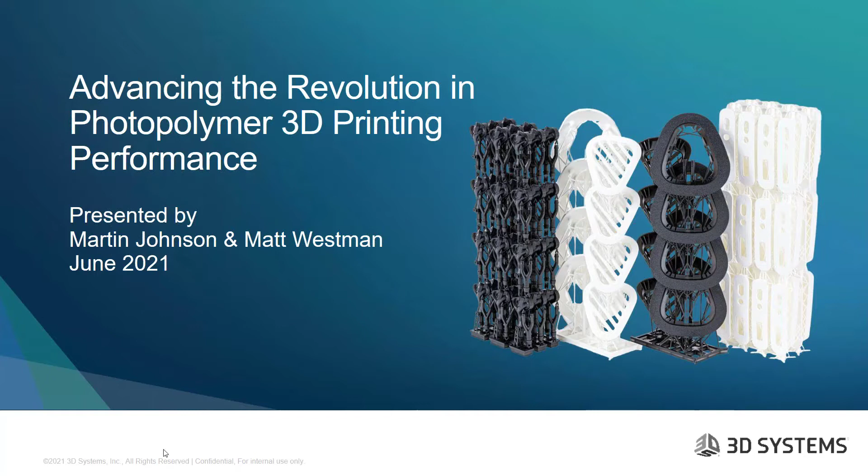At this time, I'd like to introduce you to today's speakers, Marty Johnson and Matt Westman. Marty Johnson is a technical fellow at 3D Systems and is part of the core team that develops 3D Systems Figure 4 platform. With a background in mechanical engineering, Marty has extensive experience working with injection molding tools in different plastics and brings this perspective to his work with additive manufacturing to deliver solutions that balance speed, accuracy, cost, and performance.

Matt Westman is a senior materials characterization scientist at 3D Systems with over a decade of experience in polymer development and is an expert in mechanical, thermal, and thermomechanical characterizations. Matt is a leader in developing weathering and long-term stability characterizations at 3D Systems. As an active member of multiple standard organizations, including ASTM and CMH17, Matt is committed to bringing the next generation of production-ready polymers to additive manufacturing. At this time, I'd like to hand it over to Marty to get us started.

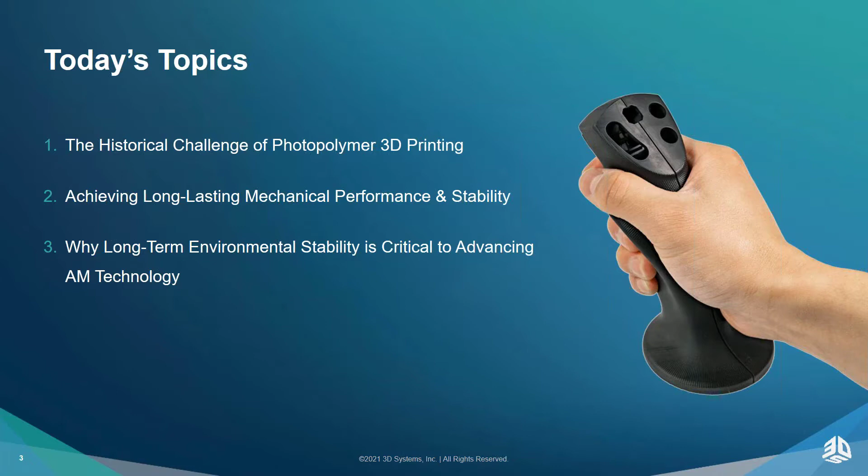Thank you, Tess. Really glad to be here and really glad to be talking about photopolymers and additive manufacturing. A lot's happened and a lot's changed in the history of photopolymers and 3D printing. We're looking forward to presenting some of that, what some of those challenges have been, and how we've really moved that forward. A big part of that's going to be through looking at how we've achieved long-lasting mechanical performance and stability, and why long-term environmental stability is critical to advancing additive manufacturing technology. So Matt's going to take you through the historical challenge of photopolymer 3D printing.

Before we get there, I just want to take a quick look at some of these advantages and challenges. One of the things that have been really good about additive manufacturing is the aesthetic part quality. Photopolymer 3D printing is known to deliver the smoothest surface quality. You can get really nice fine detail, realistic plastic parts that are really close to injection molded quality parts. So you get the smooth sidewalls and you get the feel of the plastic. That's one of the really nice things that's happened with the materials and the technology in additive manufacturing.

And then you follow that up with the overall versatility. There is a lot of versatility in additive manufacturing for looking at materials, looking at designs early in the product development phases, different ways of prototyping parts, the ease of printing, what kind of geometries you can do in additive manufacturing that cannot be injection molded, and how you put some of these parts together in ways that you can innovate and get different products and solutions for different applications.

But when you get to material performance and longevity, that's been the problem for photopolymers in additive manufacturing for quite some time. Over 25 years of use, these materials have advanced and gotten much better, but getting to that long-term UV and humidity stability has been the real challenge. Part of that is, what are the mechanical performances that you get over time? Do your parts become brittle? Do they change color? How can I use my part 2 years from now the way that I can use it today? These are some of the things we'd like to address today as we look at the different photopolymers.

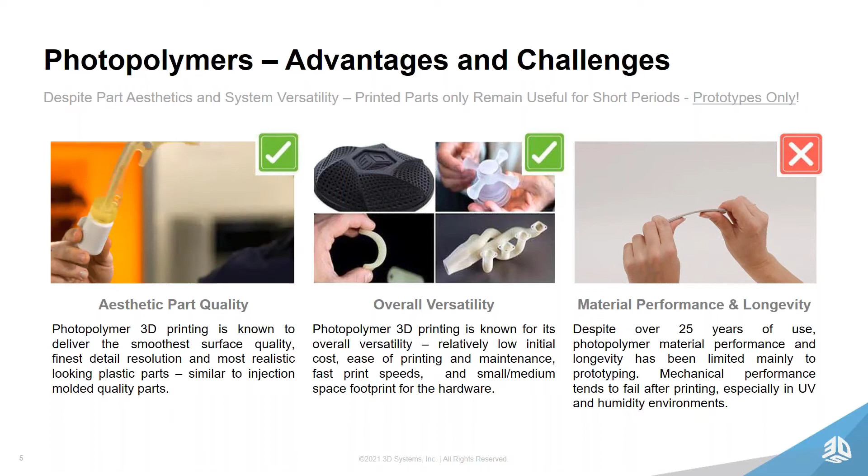So Matt, why don't you take us through how we got to long-lasting mechanical performance and stability? Thank you, Marty.

As 3D Systems approached the challenge of addressing long-term stability, the first step in this process was developing a case study and a material that was well characterized. Many years ago, we selected one of our early Figure 4 materials and began characterizing it and developing large data sets using a weathering chamber known as a QUV. This uses a fluorescent UV light source to replicate and validate ASTM outdoor and indoor testing. Specifically, we were targeting ASTM G154, the outdoor weathering standard for polymers. In this case, we were just looking to explore and understand what our material base was.

After we thoroughly characterized one of our materials and developed a case study, we were then able to generate these really lovely curves that projected hours of exposure and plotted as a function of decay of mechanical properties, which is really great. But without having any baseline or relevance to show, it's very hard for customers to understand what 200 hours in a QUV replicates.

And so the next step in this process, and this path that 3D Systems took, was actually doing actual weathering of samples. We selected 3 of our North American sites that had very unique weather environments or environmental factors. We included sites such as our Rock Hill manufacturing, our headquarters, which is going to have more of a hot and humid type of environment.

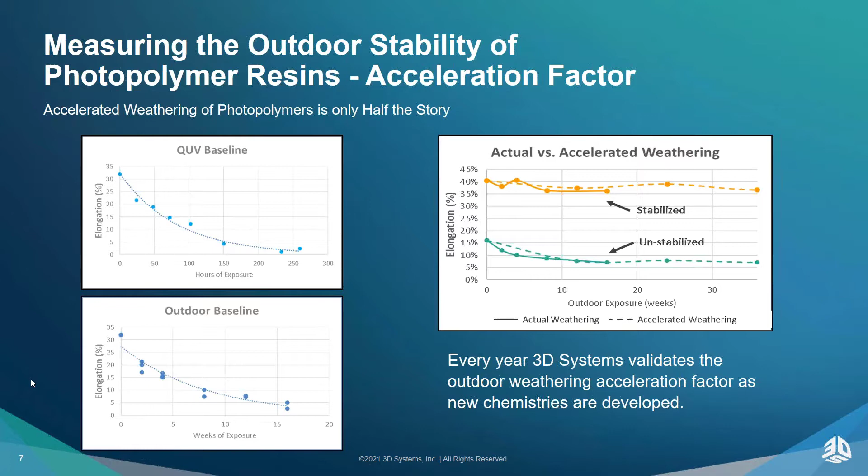So like I said, after we've developed these acceleration factors, we then went and developed some very novel chemistries and chemistry packages that were providing us best in class and really unparalleled weathering stability that you don't see in the additive space. As Marty alluded to earlier, typically additive parts and UV photopolymers specifically are very well known for becoming brittle over time. This is only exacerbated when you put them outside with a combination of both the sunlight and the moisture. This combination really drives the degradation of the polymers.

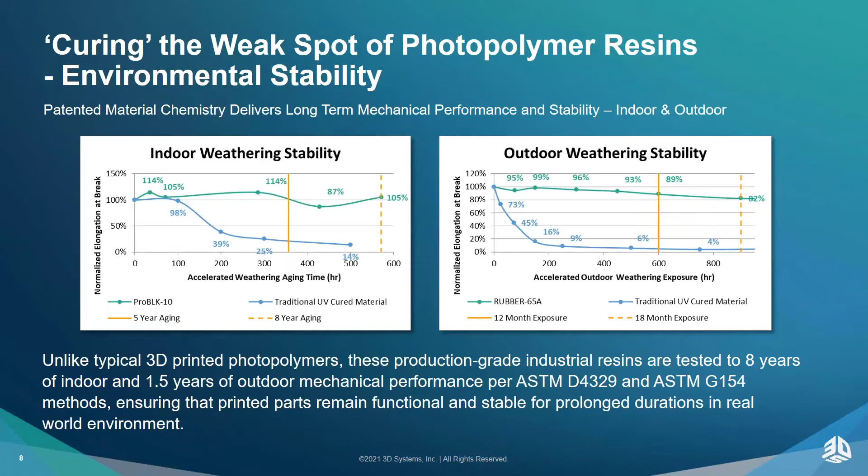Traditionally, photopolymers, and specifically elastomeric photopolymers, have very, very poor performance outdoor. We typically see them degrading much faster than the blue traditionally UV cured material we're showing here. But with our novel chemistries and technologies, we're really extending the lifetime of these materials well out past 1 year stability and out into 18 months or multiple years.

Aside from mechanical stability and tracking change in properties over time, another aspect of long-term stability that 3D Systems is looking at is color stability. Once again, with our traditional photopolymers, we know that the materials, as they degrade, also have a tendency to turn brown, turn black, discolor, and turn yellow. This is a well-known issue with photopolymers.

We really believe this gives customers the opportunity to design and develop materials for long-term applications, and they'll have that confidence that the material will not only perform well, but it will also look really, really good. Another example is our new Figure 4 Rigid White material.

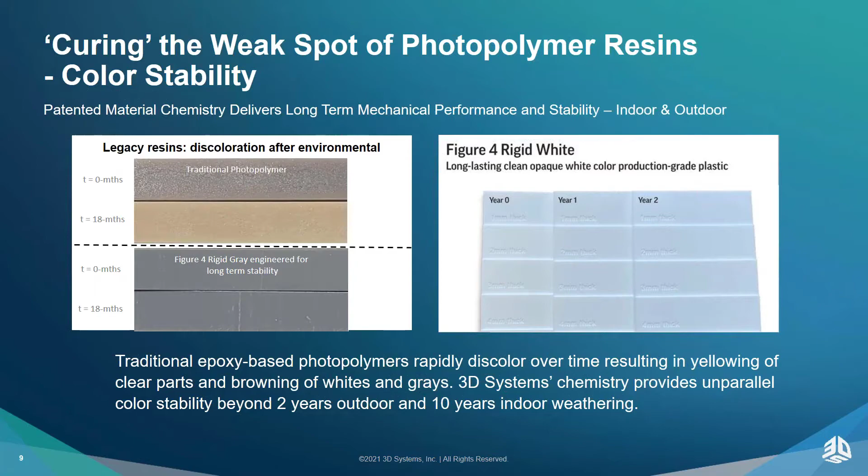Thank you, Matt. And so when you look at this kind of data and you see where these materials are lasting longer, not just for elongation, but for tensile modulus, tensile strength, notched impact, all of your mechanical properties are pushing out. And now we're looking at these in years and not months. What do we do with that? And why are the UV and humidity stable data and materials so important?

Let's look at that, because the reason why is that you now have long-lasting parts with additive manufacturing. And what that leads to is more vast applications that you can address with the different materials. So a few of the places we want to look at today are production goods, where the benefits of long-lasting parts come in, and contract manufacturing, where people are engineering for product manufacturers, OEM products, things like that. Contract manufacturers now have more tools to advance some of the things that they're doing.

Manufacturing aids, guides, rails, diverters, jigs and fixtures, the kind of things that need long-lasting applications so that they can be used to advance the manufacturing lines and even make those safer. And then you get into clinical trials, and this is where the color stability will come into play, because the color stability, especially for white materials, is really critical for things that you need to push out over time.

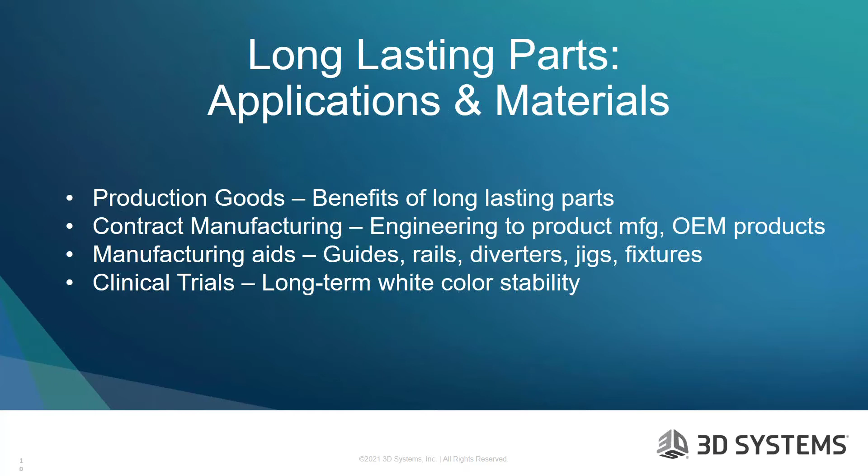So we'll start with the production consumer goods. If you look at the table to the left, you're looking at some different consumer segments: electronics, consumer appliances, sports and fitness, even outdoor goods. What are the kind of warranties that you see on these? Listed in this table are some of the average warranties you'll see for these types of products.

If I'm doing a gaming console for consumer electronics that has a 2-year warranty, and I have additive manufacturing parts for that, then I need to be sure that I can cover the shelf life for those parts, which a lot of times is a year or 2 years. And I also want to be able to cover the warranty for that part. So the long-term stability enables me to make parts through additive manufacturing for end-use production.

So you start looking at extended warranties. A supplier is not going to just extend a warranty. They can look at the data. They can look at the risk analysis. They can look at the life of the part. And if they know that part's going to be the same color and have the same mechanical properties from when it comes out of the package through the life of that product, now they can with confidence put out these extended warranties.

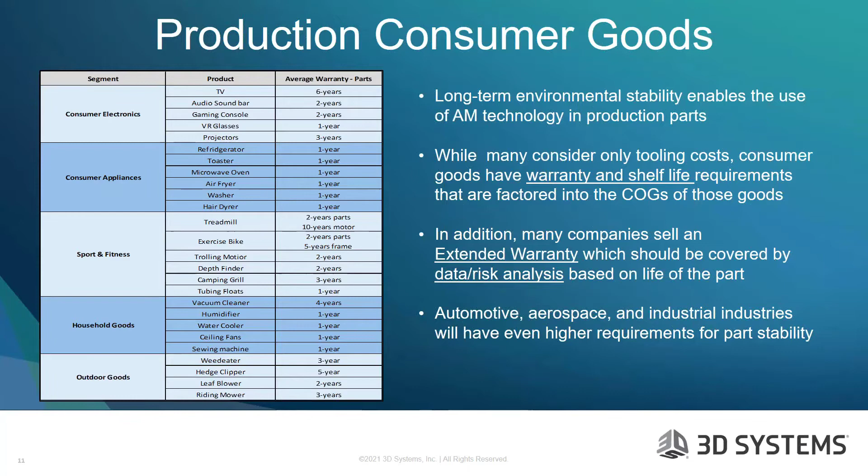So let's take a look at contract manufacturing. To the left, there's an aftermarket camera that goes onto the back of a vehicle, and the aftermarket camera is bare. A contract manufacturer took a look and said, we've got a solution to that, because when these cameras get rain on them, you can't see, you can't back up, which is aggravating in the morning backing out of the driveway. So to keep the rain and dew off the lens of that camera, they developed a cover.

This is something they could go in, they could use that cover because they know the cover is going to last. It's going to have the same properties out to 5-8 years. And it gives them the ability to start creating and innovating on some of these OEM type products and aftermarket type products. So these contract manufacturers now have, as I mentioned, a really good tool that they can go in to start producing these type of products.

This is a real good example. This is a Flex Black 20 here. You can see the chart. This is a material that's really tough that you need for an application like this. And you can see the elongation at break outdoors has only gone down to about 11% loss in elongation at break out to 8 years. So this part's going to maintain and work for a good long time.

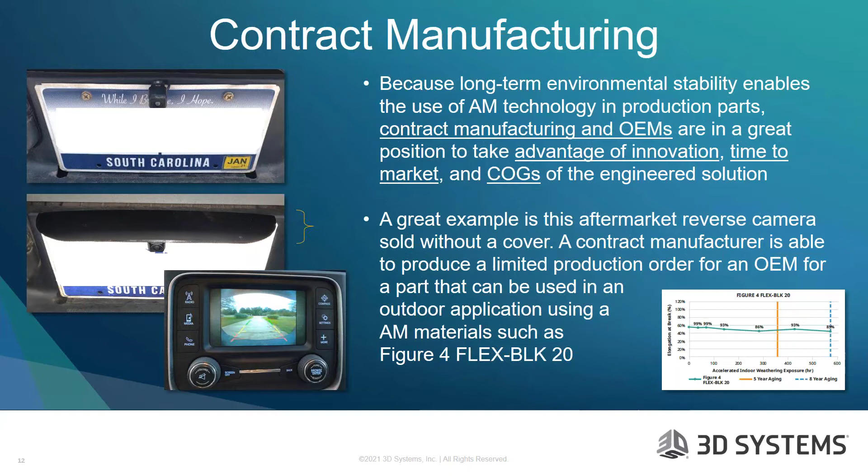Another great place that long-term stability translates is the manufacturing aids. And manufacturing aids need long-lasting parts. One of the nice things about manufacturing aids, when you see an assembly line, you see a lot of rails, you see a lot of diverters, and the system's built and comes up. But during the life of this manufacturing line, you have wear, you have new innovation, you come up with new ways to make this manufacturing line more efficient. You find guards and things that you can put in that make the manufacturing line more safe.

And so you can really start to create products that can go onto the manufacturing line to enable that to be more efficient. And the reason you can do that is these parts are not going to become brittle. If you had a part that's going to become brittle in 2-3 months, that's not something that can really take that wear and tear, and it would be disruptive to your manufacturing and drop your efficiencies and drop your yields and drop your safety, as you can use this for guards and things like that. So it's a really nice thing to have when you can go in and print and customize and do these types of things to your manufacturing line.

You also get into jigs and fixtures. You can see the picture on the bottom left where you've got a cutting tool and you set that cutting tool and it sets the depths. The part that you see in the center was used to set a depth to cut the part on the left to the exact position that you see on the right. Lots of different manufacturing and custom jigs and fixtures like this are available because of additive manufacturing and the plastics that you can use through this long-term stability, because now this cutting tool is something that can be used out past months and into years as long as this product has life.

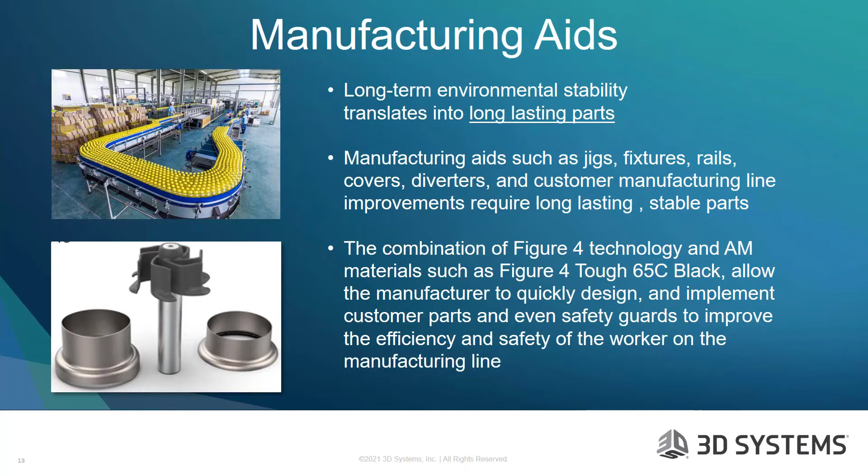And then you go to clinical trials, and clinical trials can last 6 months, some out past a year. One of the things you see in clinical trials is a lot of times these products need to be white, and they need to be white all the way through that clinical trial. What's nice about these new formulations that 3D Systems has, they've been engineered not only for long-term stability for mechanical properties, but for color. Long-term color stability is really critical for clinical trials, because now that color is maintained and gives the good appearance and the good result, and it helps get the right data through the clinical trials for some of these products.

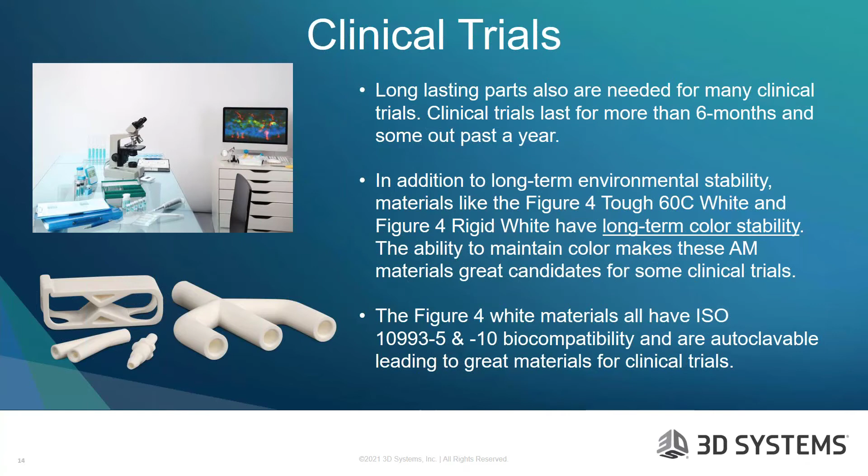One thing I would point out, when you have clinical trials, it's more than just color. Your rigid white, some of the Figure 4 white materials all have the ISO 10993-5 and -10 biocompatibilities and are autoclavable. So these materials have now not only been enabled to handle the long-term color stability through environment and through UV and humidity, you also get the autoclavable color stability that comes with these different white materials as well. And that enables you to do some of these clinical trials that push out 6 months to a year.

And finally, let's take a look at functional prototyping. Functional prototyping is a critical part in the product development cycle. In this particular phase, you're looking for data that can be used to push your product and push your fast learning cycles so that you can get the product to production quicker. You want to see that some of the properties you have, you can use to look at your efficiencies and your capabilities, but only if those materials exhibit your end product, or if your additive manufacturing product is going to be your end product in production.

And so what's nice about the functional prototyping is a lot of times that functional prototyping lasts out more than weeks. And so you want to have these materials that have the same kind of data at week 6 that you have at week 24. So you really want to be able to push these things out so you can get the right cycles to

failure. And if you're failing and you're doing functional prototyping, you want the failure not to be because your additive material failed because it didn't have the right properties, because it lost that due to age. You want it to fail because of the design or because of some other event that happened, so that you have the right data to make the right decision for that product.

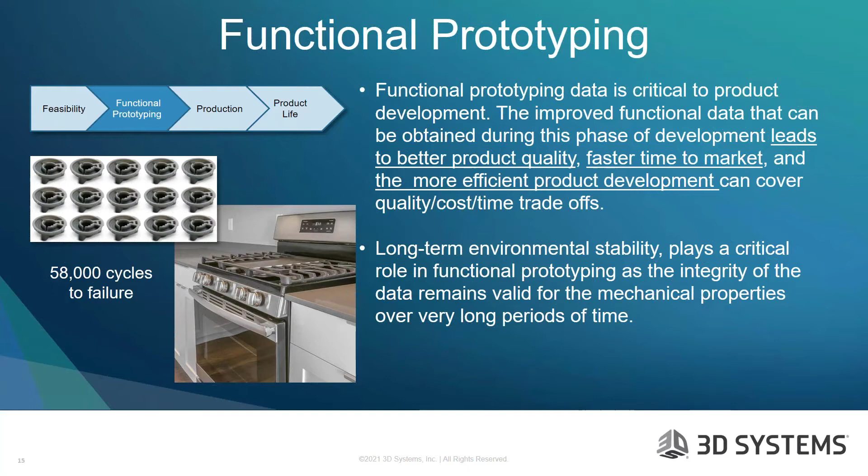So long-term environmental stability plays a critical role in this type of functional prototyping, as the integrity of that data remains valid throughout the mechanical properties over very long periods of time. And so we've talked about these Figure 4 materials, and what's really great and exciting at 3D Systems is to see this innovation with these new materials with this long-term type stability.